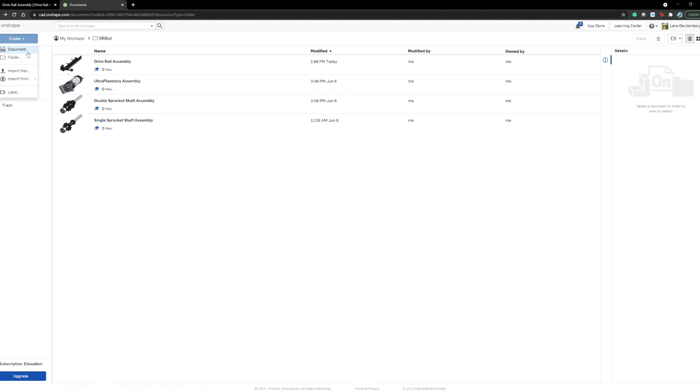This is the drive shaft assembly. Create a new document in your RRBot folder and name it Drive Shaft Assembly. Rename Assembly 1 Drive Shaft Assembly as well. Make sure you have selected the Assembly tab and not the Part Studio tab.

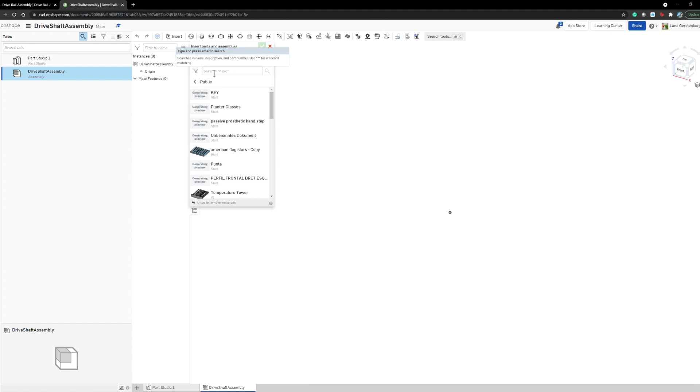Insert your parts by going to Insert, Other Documents, and then Public. Search Rev Shaft Stuff Library and insert 4 3mm spacers, 3 through-bore bearings, 2 shaft collars, and a 5mm by 90mm hex shaft. Directly click on the check mark after selecting the hex shaft and fix it at the origin.

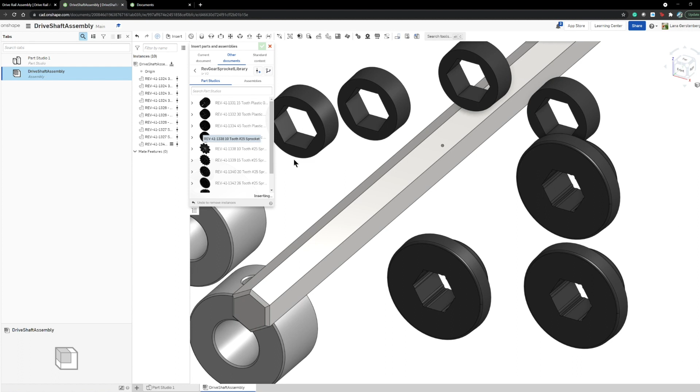Next, insert from the Rev Gear Sprocket library. Insert the 10-tooth number 25 sprocket. Next, insert from the Rev Wheel library. Insert the 90mm Omni wheel from the Assemblies tab.

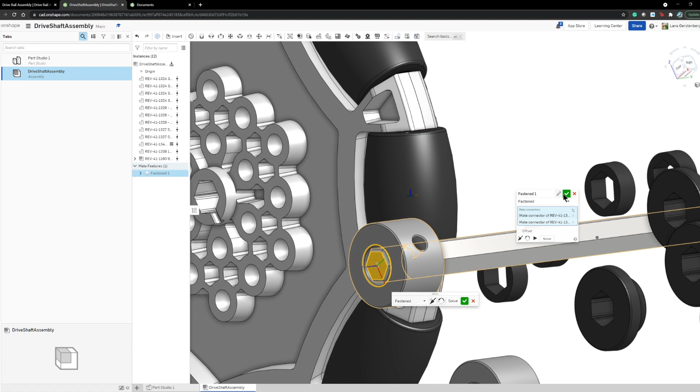Create a fastened mate between the collar and the hex shaft, and rotate the collar so the set screw is on a flat edge of the shaft. Mate the Omni wheel to the collar and rotate it so it is properly aligned on the shaft.

Mate the through-bore bearing to the Omni wheel with the smaller side facing the wheel. Flip and rotate it as needed. This is what your drive shaft assembly should look like so far.

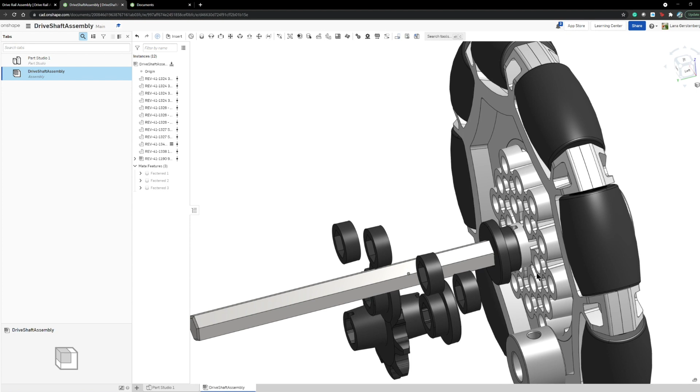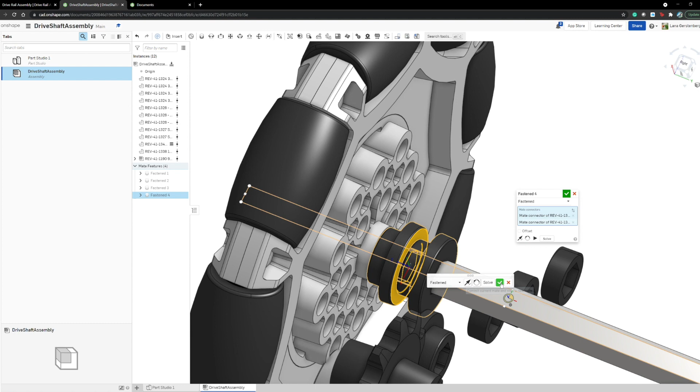Mate another through-bore bearing to the one already on the hex shaft with the smaller side facing the other through-bore bearing. Flip or rotate it as needed so it is properly aligned on the shaft. Check the mate between your 2 through-bore bearings to make sure they don't overlap.

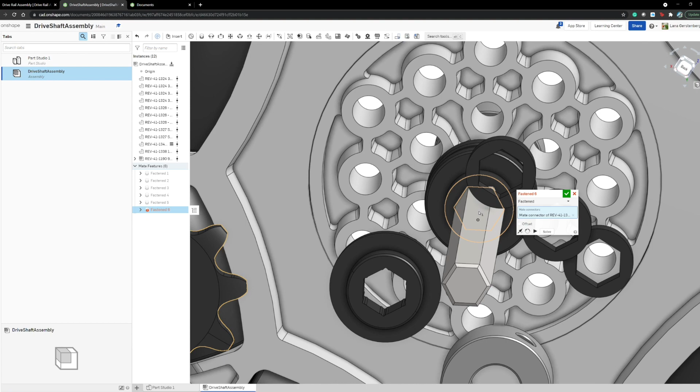Mate the 3mm spacer to the through-bore bearing. Mate a sprocket to the 3mm spacer. Again, flip and rotate the sprocket as needed so it is properly aligned on the shaft.

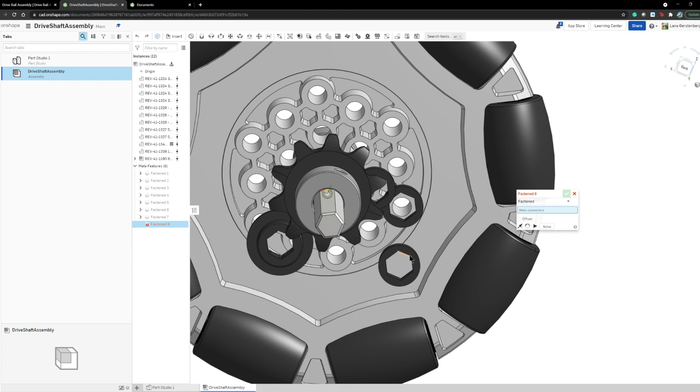Next, mate the shaft collar to the sprocket, and again, rotate the shaft collar so its set screw is on a flat edge of the shaft. Next, create a fastened mate between the hex shaft and a 3mm spacer. Mate the other 2 3mm spacers onto the hex shaft as well.

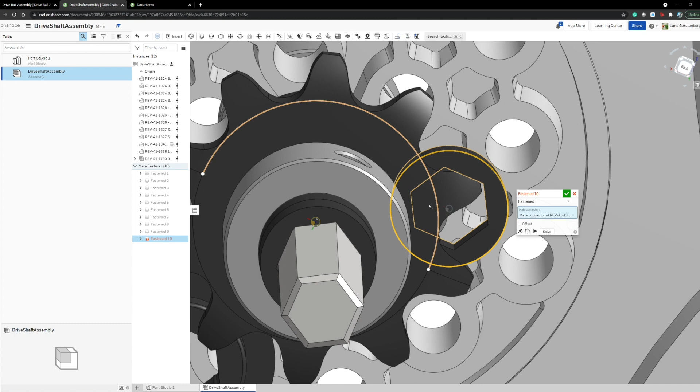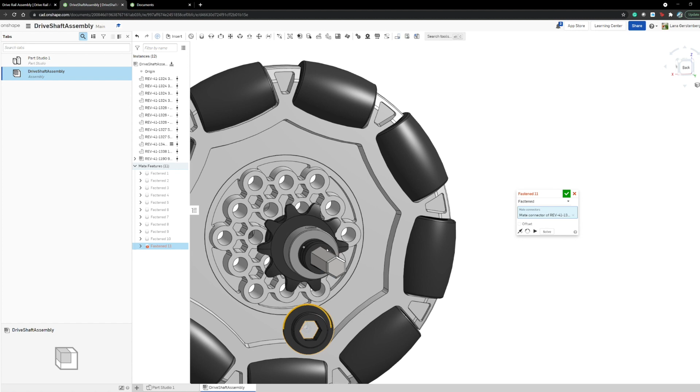After we have finished assembling our shaft assemblies and our ultra-planetary gearbox assembly, we will move on to the drive rail assembly. We are using Omni wheels in our RRBot. They have rollers mounted around the outside, which rotate at 90 degrees. This allows your robot to strafe. And now your drive shaft assembly is finished.